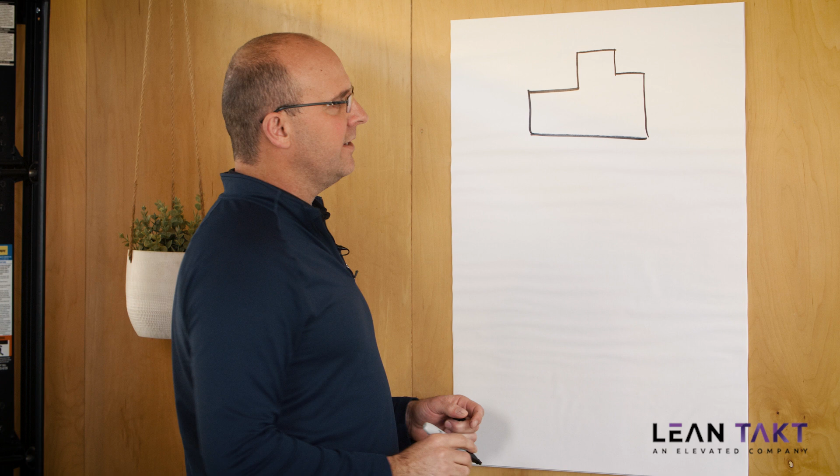I remember one time I was the superintendent over a project and we had a basement that looked kind of like this. Actually, it looked exactly like this. But anyway, you get my point. It had this footprint and it was underground by about 14 feet, okay? So I did a schedule, you come up with your typical schedule, however you want to do it.

And I was really worried because this project was in Tucson, and I did a project walk in Phoenix with a similar kind of project. And I remember going to the job and they were like, we're 6 weeks behind on the basement. And I was asking why. Well, we had a logistical problem here. We couldn't get the cords up fast enough over here.

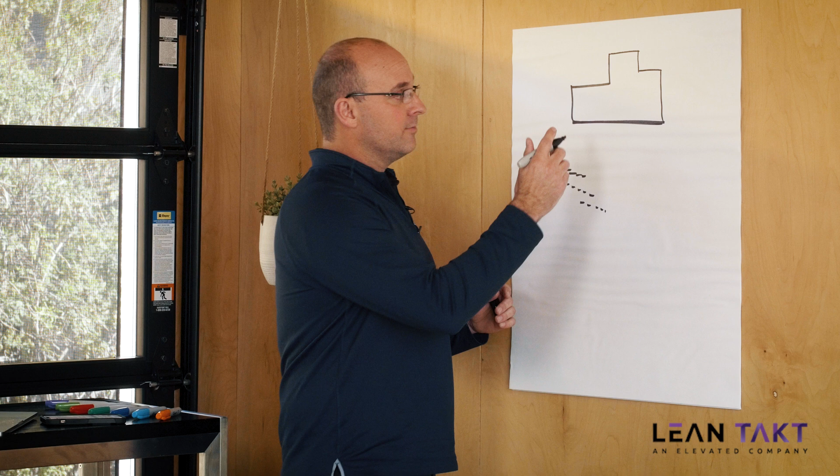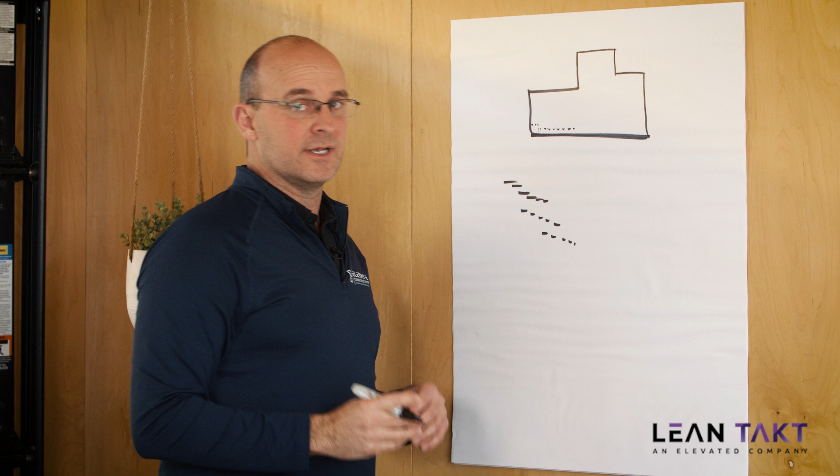So I freaked out. Okay, so on I'll call it my building, but it wasn't my building, we had large spread footings for columns. We had continuous footings throughout, columns throughout the center portion of the building. It was a mild reinforced concrete structure. And it also had a ramp on the north side. This is north on this side, okay?

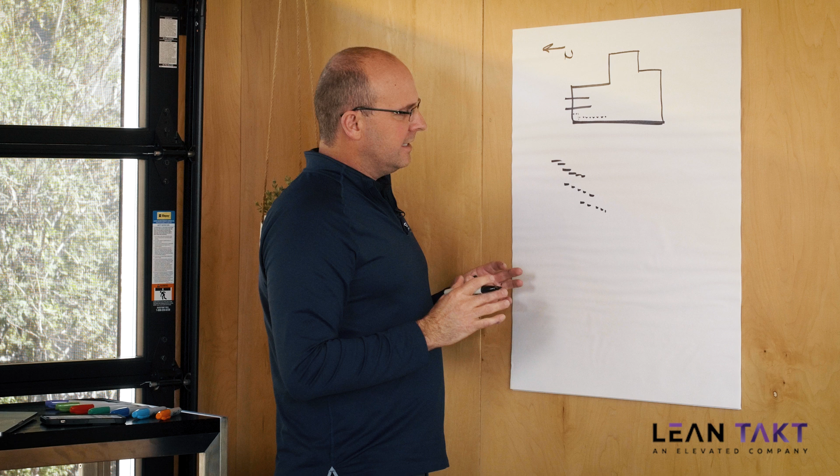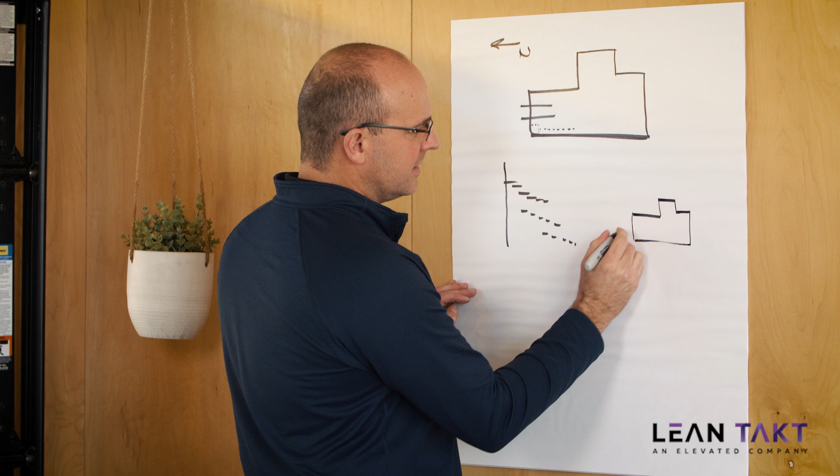So I kind of freaked out. And I went here on the schedule and I invented, thank goodness, a technique that really saved me. I created the schedule and I went day by day. And I said, okay, sketch number 1, what is my building going to look like? Sketch number 1 for day number 1 is, once it was excavated, we had a ramp. All right, we are going to excavate the footings over here on this first placement.

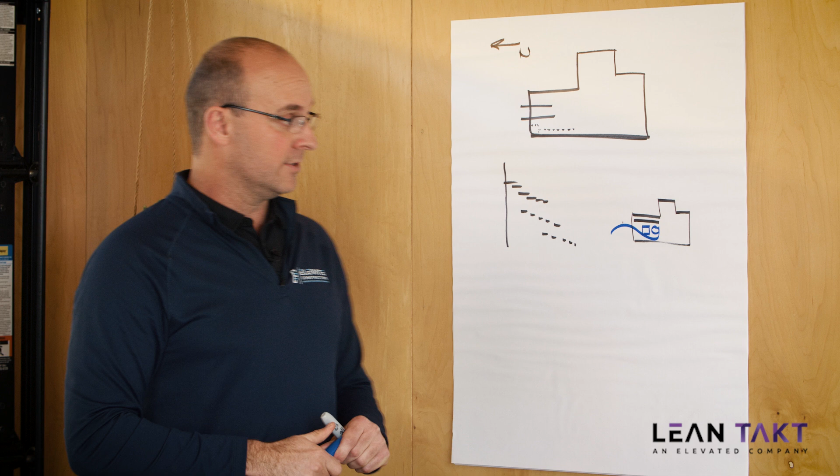So that means that I'm going to have a backhoe, I'm going to have a pile of dirt, I'm going to have dump trucks going in and out, and that's what my basement is going to look like, okay? So basically that was day number 1. Now what is it going to look like on day number 2? So I just drew my line down here and I had a separate sheet. And I'm like killing trees. I'm not proud of it, but I'm murdering entire trees with how much paper I'm burning through here.

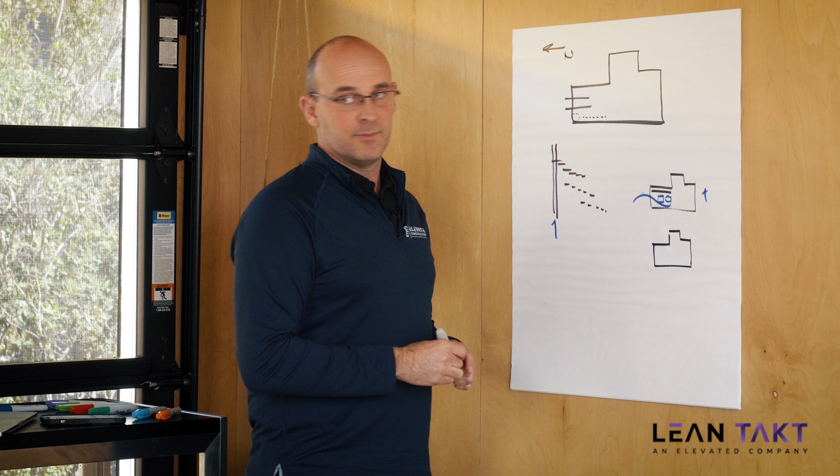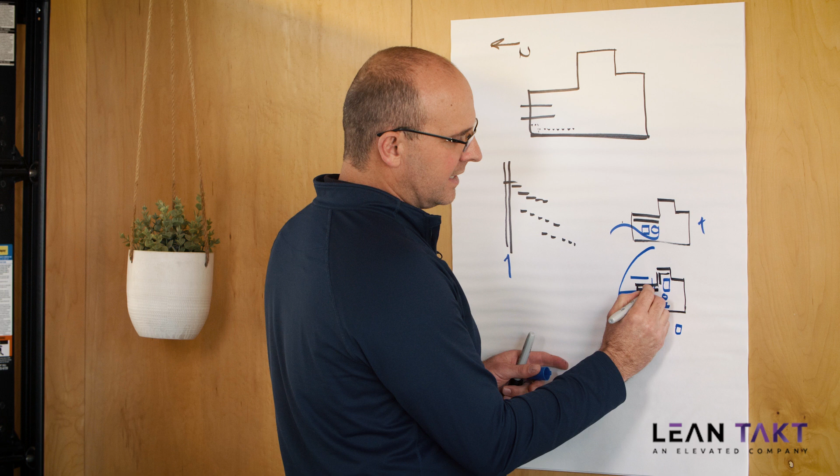So I'm like, okay, the excavating crew is here, but over here we're going to reinforce the footings. So I need to have my backhoe right here, my spoils pile. I'm bringing trucks in and out. Oh my gosh, the reinforcement. I'm going to have to stage the reinforcement up on the bank and really hit this with a tower crane. So I need my tower crane up by that time so that the workers can access. Oh, I'm going to also need a worker access down here. So I barely fit. Okay, totally fine.

So I'm going through this and I'm getting down to the point where now I've got a basement and not only am I working over here with footings, not only is reinforcing happening here, but we've got footings being placed over here. We've got spot footings out here in the center. There is scaffolding going up for shotcrete around the rest of this thing. And I'm literally drawing this out.

And what I realize is, I've got the entrance blocked with my spoils pile and my backhoe. I have barely enough room to get my reinforcing over here to this side. I don't have enough room to place from the bank, so I don't have a way to get my pump in here to place the continuous footing and the spot footing, and there's no room for forklift access over here for my scaffolding for my shotcrete. So I've got a big problem here, and I got a big problem here. So my wonderful schedule, I got a problem here, and I got a problem here.

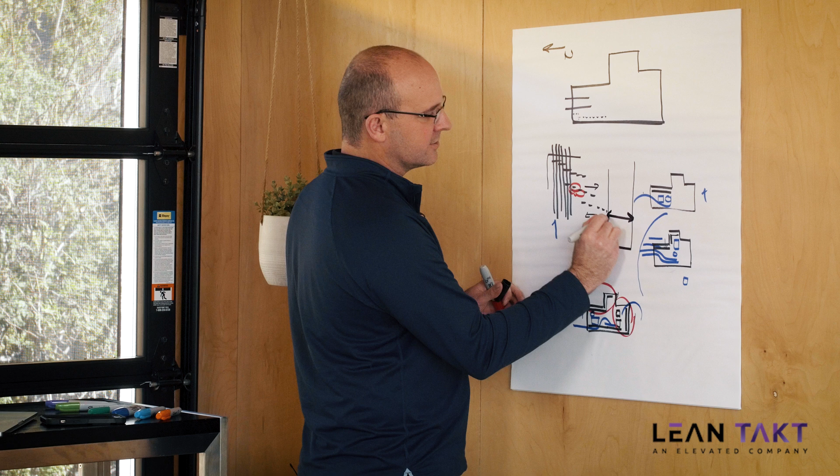It ain't gonna work. So what I start doing is saying, all right, well, this would have to move later, and we would have to move this back in. And basically my schedule grows from this wishful thinking to, oh my gosh, this is really how long it's going to take. And it doesn't come clear to you until you do the day-by-day analysis.

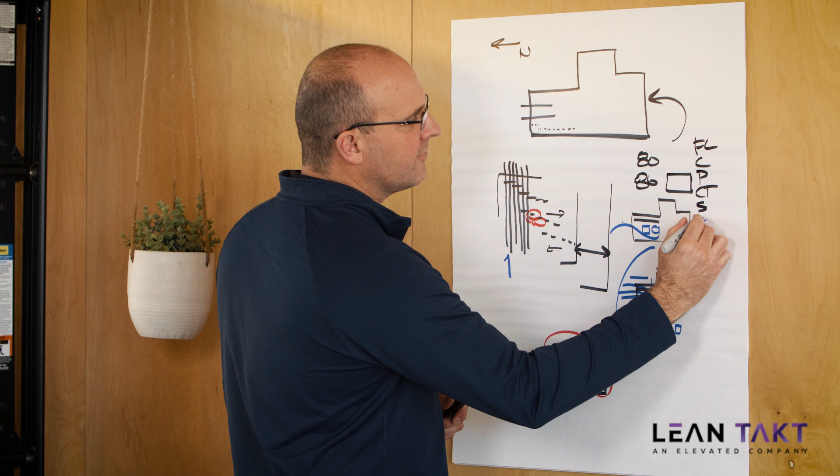If you've got 80 days to build this basement, you should have 80 pieces of paper drawing out where's your forklift, where's your crane, where's your pump, where's your concrete truck, where's your scaffolding, where's the reinforcing, where's the worker access. You've got to draw all of these components in here. I call it a day-by-day analysis.

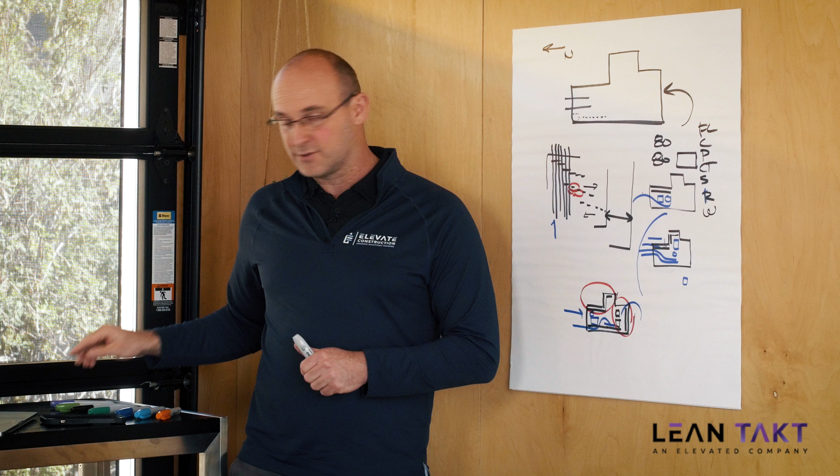I'm by no means the single source of truth, but I've never seen a basement finish on time without doing this day-by-day analysis. And I promise you, whatever schedule you thought you could keep is not going to happen. It's really going to push out. And you've got to know this in order for you to be safe.

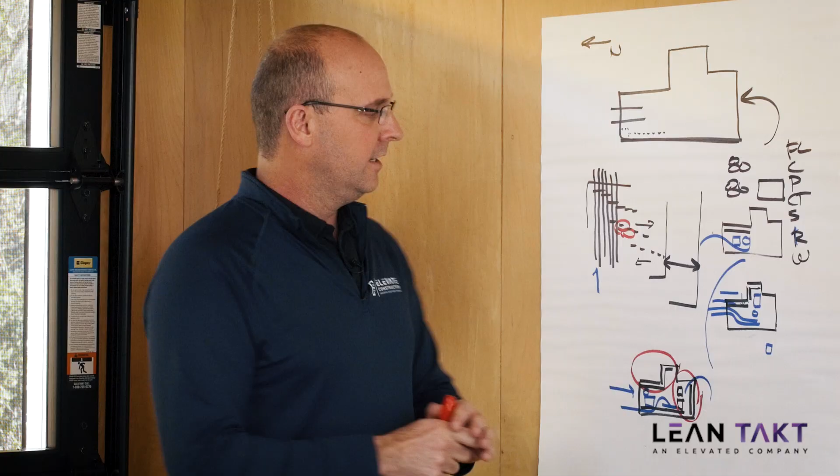So my recommendation is anything on your project where your logistics are restricted, where you have that zero lot line, where you have a postage stamp site, where you're in a basement and you're constrained. You are not driven by durations and productivity. You are driven by logistics and space. So you have to analyze, do I have enough space day by day?